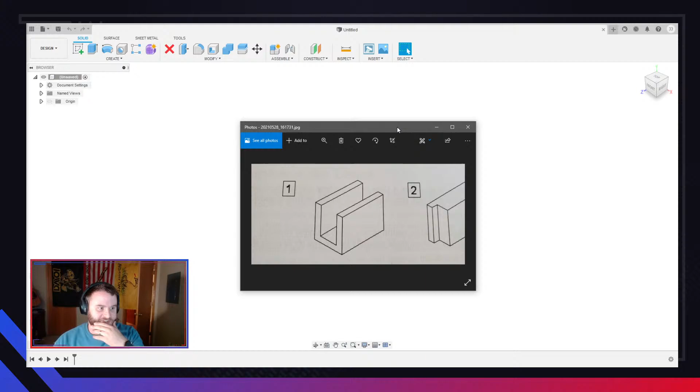The point of these problems is just to kind of get used to whatever modeling software you're using. And we're going to use Fusion. That's what most people use because it's free. So, we'll drag it on there. This is the first one we're going to make. It's just a U-shape. This one's going to be super simple, just an extrusion. As we go through, they get harder and harder. There's roughly 50 or so of them.

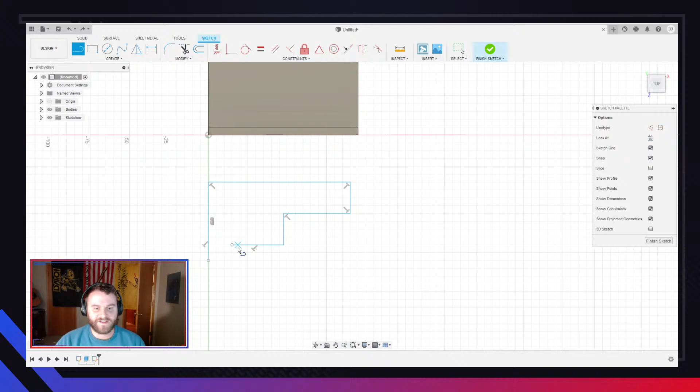All right, we'll do this step. Let's just keep this on the same plane. We can see it's just a simple step pattern like a stoop. These first couple ones are pretty easy. It doesn't have to be exact. When I took this class, each section has different things in a modeling software that it wants to teach you, and this was just to make sure that you understood that.

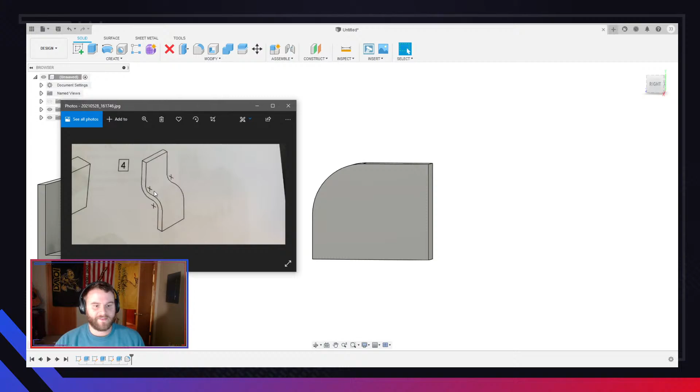Moving over to this shape, this is kind of different because we got these circles here. Now you can try to make this by using like a fit point spline to make a curve, but we're just going to use that fillet tool again, and we're just going to come down. We're going to offset this because we want it the same everywhere. Connect them. Now just like that other piece, I can put my fillet in right there. Let's make it a little deeper. Let's say 15. Oh, that doesn't look the same.

Well, you know what? I actually may have misspoke, because if I just do the fillet on this side, I'd have to extrude it first. If I just did the fillet on this side, watch what happens. So I can do a fillet over here, 15. I got to make sure though that I come up here and do that. So in this case, doing it all on the sketch would probably be the best bet. But either way, we've got it.

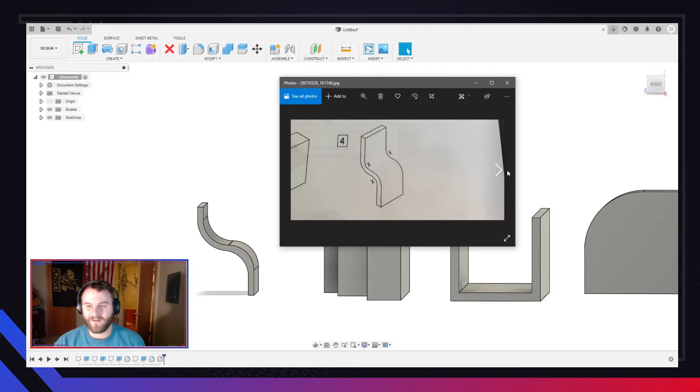This has been just a couple minutes. We've already gone through 4. Like I said, these first ones are going to be super easy. But as we get harder, especially towards the end, we're only 10% of the way done. They're going to start getting a lot harder. This one, we have some circles. Fusion makes this super easy.

We'll just get some circles up here, right? A big circle. See how this line comes? Tells me it's center. I can do it over here, whatnot. Do a smaller circle. And we can just come up here to the apex, and it'll literally help me with that. And I can select all these shapes. I'm holding shift, and I can extrude them up.

You can see the lines weren't exactly where I wanted them to be on this side. I can right click on the sketch, and I can edit it. You see how I accidentally came out? So let's delete this line. Let's just drag that point right where it needs to go. Hit OK, and then we fixed it. So boom, there's 5.

Number 6. All right, how are we gonna make this? Any idea? Let's do a square, and then we'll do a circle, and then we can do another circle, pushing it through, or we can just do it all in one go. We can do that too. So it doesn't really matter what plane we sketch on. So we can do like a square.

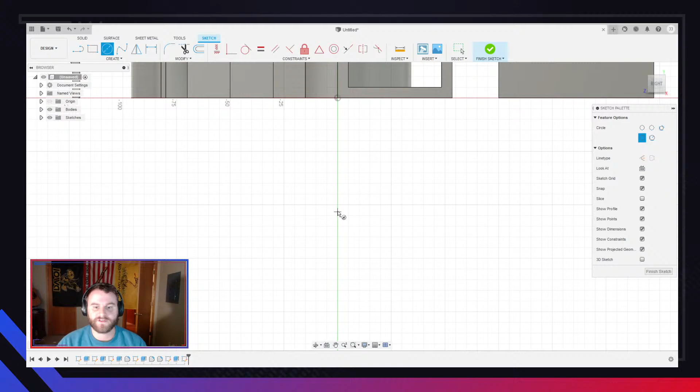See how I come over here and I get this triangle, which means I'm center point. So we can do that. And then we need to have our inside. This isn't going to look exactly the same. But now I can select what parts I want. You know what? That doesn't even look remotely like what I wanted. My fault. Let's start with a circle and then do a square. So that'll be our outer part of the arch. That'll be our inner part of the arch. And then we can do a center point rectangle. And we can do that.

Cool. Now the cool thing with Fusion 360 is, if I was using Creo, Creo wouldn't like me to do this. But I can select this arch and I'm holding shift. Sometimes I can't remember if it's shift or control. I think it doesn't really matter on this. But I can just select this top part and then I can select these as the only parts that I want to extrude out. So I can extrude those out. Bada bing, bada boom. There's our shape. Easy peasy lemon squeezy.

Number 7, a bushing. Do I really need to show that? We kind of just literally did that with a circle. Like I said, I'm just going through this textbook. Some of the chapters have you assemble these parts into a big thing, and you can spin them all around and stuff. But we're not going to do that. So look at all these parts we got. This was just a couple minutes. It's pretty easy.

This part's going to need 2 extrusions. So how are we going to make this? Well, let's break it down. Let's make this part first. Now we can either make this as a square, and then we can cut the notch in. Let's just model it with the notch already in it.

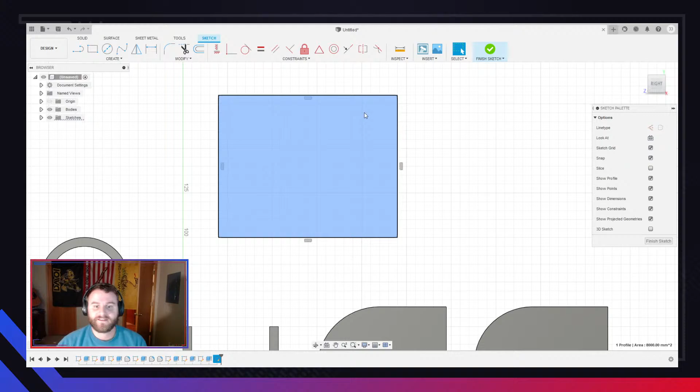So lately we've just been doing the same plane. Let's start, let's take that. And now we need to make our notch. We're going to learn how to do a mirror right now. So let's take and actually extrude this out. And basically I'm going to make one side and then I'm going to mirror it over to the other side.

So what I need is a plane for this. So I want to do a mid plane, midway between this object and this object. Cuts it right down the center. I can click this surface now. This is a surface I want to be sketching on. Create a sketch. And I don't really have to remember these measurements because whatever I'm going to do on this side, I'm going to mirror to the other side. And I don't have to finish it, but I will just for good etiquette.

So now what I can do is I can take this, I can extrude it distance to object. I just want it to come to this back side. And then I can take this extrusion, I can create a mirror. I already have the extrusion selected, and I can mirror it across this mid plane. And there, it cut it. And I know that that is perfectly in center, mirrored from the left side to the right side.

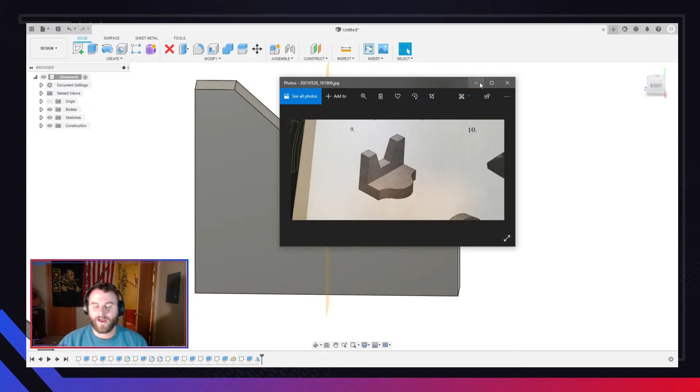But we have to add this little part right here. So how can we do that? Some people might be tempted to draw it on this back side and then extrude it up. We're going to do 2 steps. We're going to make a square and then we will fillet it. Well, if we did a fillet there, it would have to come up and around. I guess we'll do that on the back side. So create a sketch.

I regret now leaving all these shapes here, but that's all right, because even though I'm sketching on that bottom part, I can still come and view at the top part. That's totally fine. And I'm just going to come to the edge, see how it snaps in. It will kind of snap in on this point, but not really. But what I can do is I can do a 3-point rectangle. And that way I can have 1 point be here. It kind of didn't do it. 1 point be there.

And then you see, oh, that's why I didn't snap. It's because it was the wrong shape. Let's try this again. I can snap 1 point here. I can snap 1 point there, and I can bring it out. And then look, it's kind of got this circle shape with some fillets. So we can do that. Triangle to find the center point, bring it in.

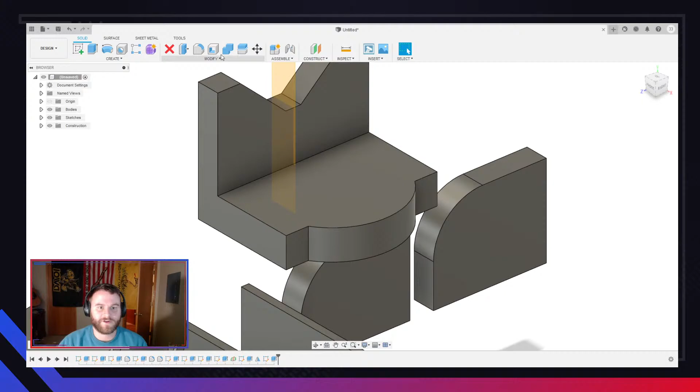And we're just going to extrude. Well, we're going to extrude everything but the part that's touching. And we'll just extrude it up. And that has some curved geometry. You know, I'm not going to go back and fix it, but we can select these points right here and give them a little bit of a fillet.

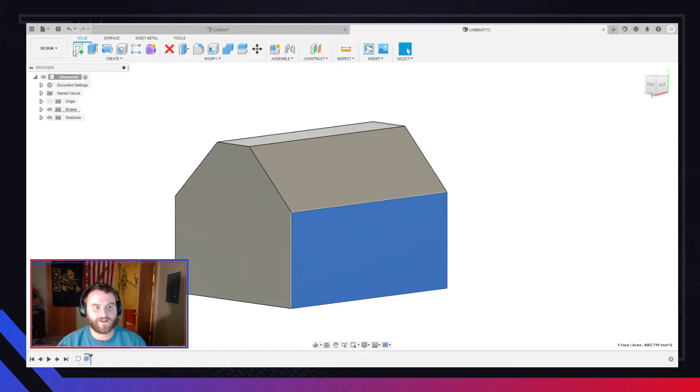Boom. And then what shape do we have? Well, that didn't really work out very well, but we just want to extrude out everything but this circle shape. So that's fine. I can click on this wall, and we're kind of doing the opposite. We're putting in everything that we want to keep. So I want to keep that circle. I want to keep a square.

Right, and this can come all the way down. And then what I can do, I don't need to do all that. I just need to do this part. I just need that. And I can extrude this out. Boom. We didn't get our dimensions just quite right, but it's good enough for government work. It's good enough for what we're doing.

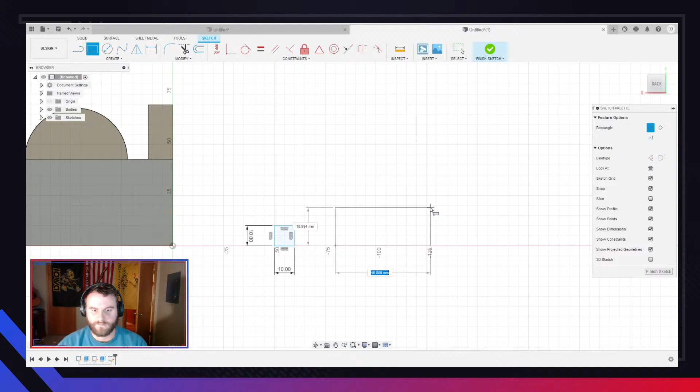And then number 2, I can do these 2 squares, and then I can mirror an arch over these. So why don't we do that? Let's take and make our 2 squares. And let's just do 10 by 10. How far apart? It doesn't matter. 10 by 10. Let's extrude them out 50, and then we have arches over them.

How can we make these arches? Easy. Or how can we make 2 of them? We're just going to use that same tool we did before, that same trick, the midplane. And then we can sketch on this one, and we can do our first arch. You know, you can do different types. I never remember which one I like to do. I guess this one is good enough.

You know, because they're all kind of different. Well, see, they're all kind of different. Let's do this one. See, I completely freaking forgot, you know? I literally just did it. And like I said, I forget what arch is what. And remember, we need to connect them. And then we can extrude them out.

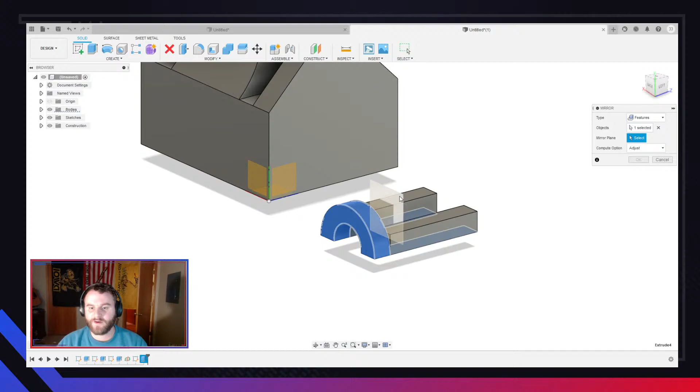So there's our arch. So we need to bring it over to the other side, remember? So I want to click this extrusion just to make it easy. Create, mirror. Our object is already selected. Our mirror plane is this one. And we've made our part. Is that backwards? Did my dumbass make it? Yeah. Oh, it's all right though.

All right, this part, we're going to make this with two pieces. We're going to do two extrusions, one extrusion up, one extrusion down. This first chapter is almost all about extrusions. So we've got a square, and what else? Then we have a circle on there. This is kind of like a part that we did on the last one. Let's extrude it. And then I can just come in here and I can extrude it again, taking away material.

So there's my center point, and this circle right here will tell me when I'm in the center point of that original circle. So I can click that, open it. So now, this time when I hit extrude, before we've just been joining, you can see here. Now, Fusion will do it automatically, but when I bring it in, it'll turn red and it'll cut. Now I can do all sorts of things. I can only cut it this far. I can cut it that far.

But one thing you should do is come over here, and where it says distance, you should either change it to all if you want it to go through everything, or to object, and you can click the object that you want it to extrude to. But this is good because I can also hit this object over here and it'll extrude out that distance. But we'll just do it there. And there's our shape.

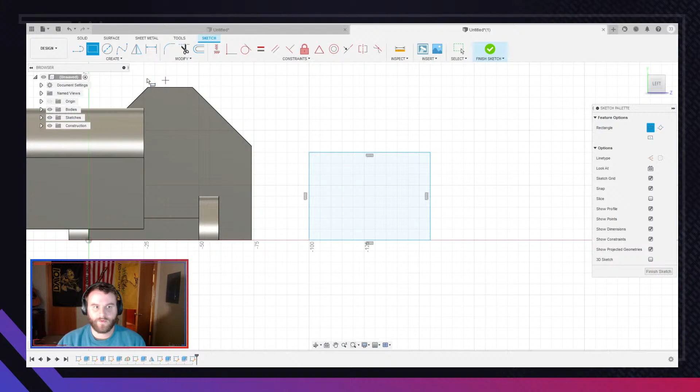So we got another one. This is going to be just kind of the same shape, the same pattern where we come up. Remember last time we used constraints? Sometimes people will sit here, and I know I did when I first started, I would sit here with a notepad and I would write, okay, I made this one 24.083 millimeters long at 138.4 degrees. Okay, no, just make that, bring it in.

And then we're gonna use our equal tool. That equals to that. This equals to that. Bada bing, bada boom, we're done. Especially for this where it doesn't really matter what the length is. So that needs to be extruded out with a circle. So we're actually gonna go back into the sketch and we're gonna give it a circle to begin with. So there's my equal point.

We're gonna extrude this out.

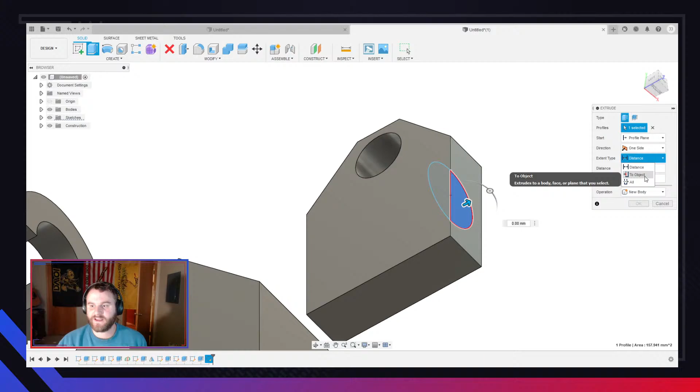We'll bring that up a little bit because we've got to remember that we need to make room for our cutout. And we can extrude it. We're going to do the same thing to object. See, if we did it, are those matched? If we did it through all, it would keep going. I don't think there's anything in the way yet, but we'll keep it there. And there is our object. Easy peasy, lemon squeezy.

You know, I was talking to CTRLPew about this, and I was like, hey man, is this something that your viewers may want to watch? And he goes, possibly. He goes, but I think my viewers would be more interested in actually 3D printing, like making a firearm. And I was like, I can't do that on YouTube Live, dude. Plus, I've never really done it on my own from scratch, so I kind of want to be that good. Ugh. But that's all right.

So moving on to the next one. This one's going to be some fillets. We haven't done a fillet in a couple times. So let's make our square. Now we can do the same thing. Well, let's extrude that out. And we can do the same thing we did before. Remember where we right-clicked, sketched, and we offset? We can do that too.

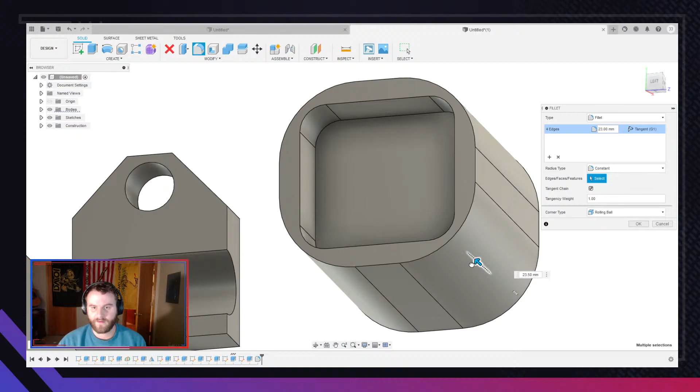And we need to extrude that square in. And then we can come in and fillet the insides. And we could have filleted the outsides at the same time if we really wanted to. But I kind of want to give them a different dimension, like maybe a little bit deeper. Yeah, that's a lot different. It's a lot more round than I wanted. But it's the same principle, you know. So what's the next one?

Next one's this kind of jazzy shape. Jazzy, what is jazzy? What the hell does jazzy mean? Oh yeah, this shape's called jazz. Well, isn't jazz what you'd see at Taco Bells, that weird busy design with the different colors? I'm pretty sure that was called jazz, like American jazz or something. I'm pretty sure that is that.

Remember before where we did the equals? We can do that again.

I don't know. I'm not a design person. My wife, though, she went to art school for a while. And so she actually... Now, hold on.

Let me stop my tangent to talk about this. I just did that shape. So, I essentially want to cut this out. So these don't really matter. But I need to make sure I do a line over here, because this is actually what I'm going to extrude out. See how now I can select it? So we're going to use the not parallel, equal. That is equal to that. That is equal to that.

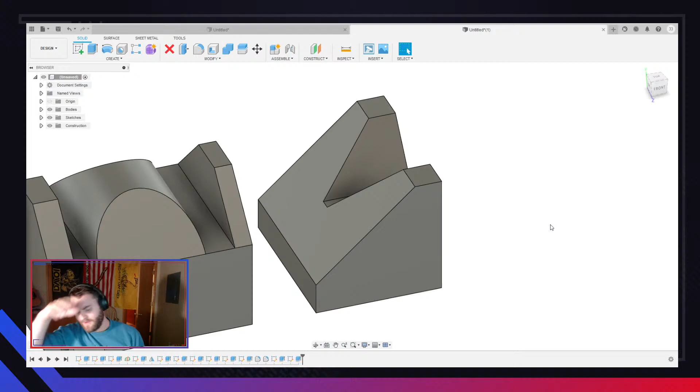But all the time, she'll see a design. I'm like, oh, look at that guy in that flannel shirt. And she'll be like, oh, that's not flannel. That's Irish creamsicle dream of independence. Don't you know the difference? I'm like, what's the difference? And she goes, oh, well, plaid is just lines. But then Irish creamsicle is lines and then little lines. And I go, how the hell do you know that? Like, what is that? Is that what all the money you spent on art school got you?

This is a square. This is a square. It's just a square and a circle.

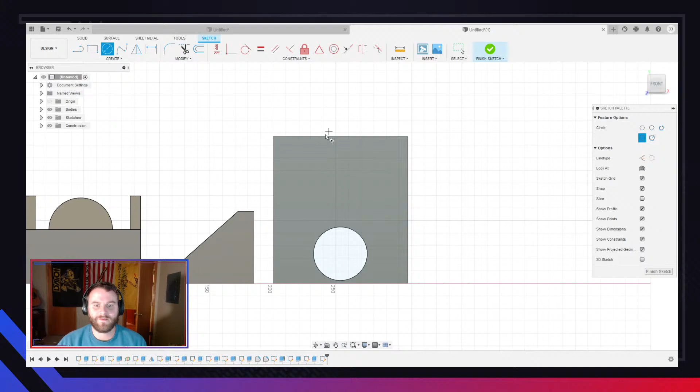But the issue is loading the slideshow up, it just wasn't working. And it would only do a couple at a time, but I couldn't get it to just load them all. So I thought, oh, why don't I just pull the pictures up and then have it stream in a little box, that window. Then it decided that, technically, because the name of the window changes with every other picture, after the first picture it's not going to work anymore. And I was like, this is some bullshit.

So look at this. We're going to do another extrude, but we got to do 2 sides. Because look at this, it comes all the way down and we made a boo-boo. We could have made this circle on this other side, or we could have just extruded it that way. But we made a boo-boo, so we got to do 2 sides. And I don't know if you know this, you probably don't if you're watching this, but I can extrude both sides. I can come to one side, I can come to another side, I can come both sides equally, or I can do one side a little bit and the other side a whole lot. It's totally cool.

It's fab. So I can come over here where I have one side. I have the 2 sides, right? That's a little bit one side, a lot the other. And then I have symmetric. So I want to do 2 sides. And this distance, right? I can just drag it. That's fine. I actually need to do both of those. And then this one is going to be to object because I don't remember how thick I made this. So I can just click back here. It's going to automatically default to cut, but it's easy peasy to just come over here and just hit join.

And there's our shape. Oh shit, we forgot that part. That's all right, because we can just extrude that away. Oh my goodness, look at that. I love how I'm using this textbook that's for Creo when I could not have done that in Creo. I mean, I could have, I would have had to make a new circle, but it would have been a pain in the butt to do with Creo. We've only been doing this about 30 minutes, and in Creo we would have been here probably an hour already.

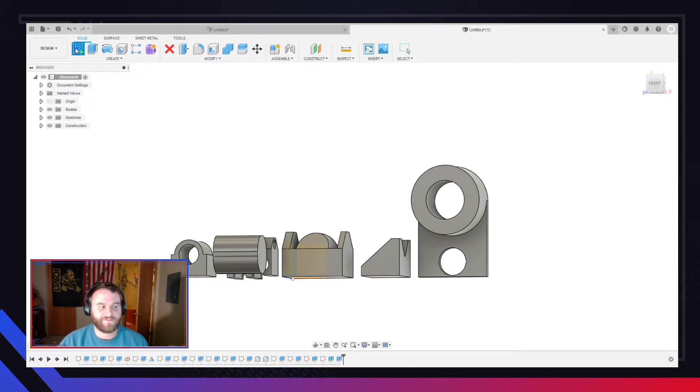We're kind of getting into the hard parts now. Just kidding, this one's easy. But the next ones, they're going to start getting harder. And like I said, we're going to try and go through all 50 or so. What are we on now? Well, 6, it started over. We're doing good. We're doing good.

So we can make this as a U shape like we did before. So let's just edit that. A U shape, cut it down, add a circle. So where's this part? Right here, our U shape. Create a sketch. I can just make a line. And I'm not editing the sketch, I'm literally just sketching on the side. And a circle. And then watch this. This is going to be the quickest one we've done so far. Extrude it out to the other side. Magic. Imagine that. It's so quick.

Next one. This one's a little more difficult. So how are we going to do this? Do you got any ideas? Because I already know. Well, do I? I mean, we could technically make this like a block and then cut it through. Or we could kind of sketch this geometric shape. Whoops.

So let's do this. Let's start off with a block, and we'll do the equal thing again. Not a block. We'll do it line by line, and we'll do that equal thing again. So let's come out here. We got the back, we got the outside, right? And then it comes over. I think it comes out, comes in, comes down, right?

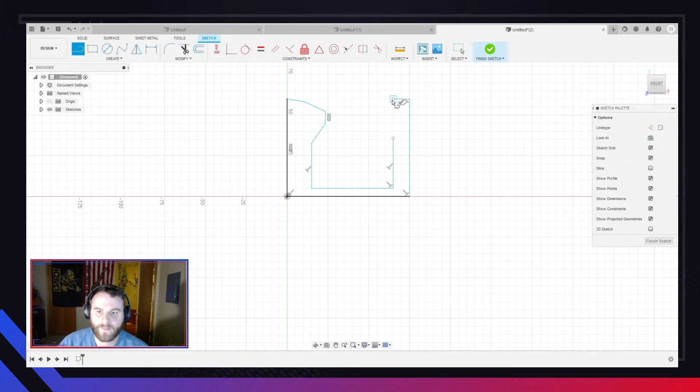Comes out, comes in, comes up to that, something like that. Oh, those are supposed to be straight. We can do that. So straight, boom. Look how it locked in. You see that? It's already locking in that it knows it wants to be perpendicular. So I know that, where's my things? I know I want that to be perpendicular, vertical, that to be vertical, over constraint, it's fine.

I want this to be perpendicular. I want this to equal that. I want this to equal that. I want that to equal this. I want this to equal that. I want that to equal this. And I want this to equal that. And I'm done. And you see how, like I said, dimensions don't matter on this. But we cut that out.

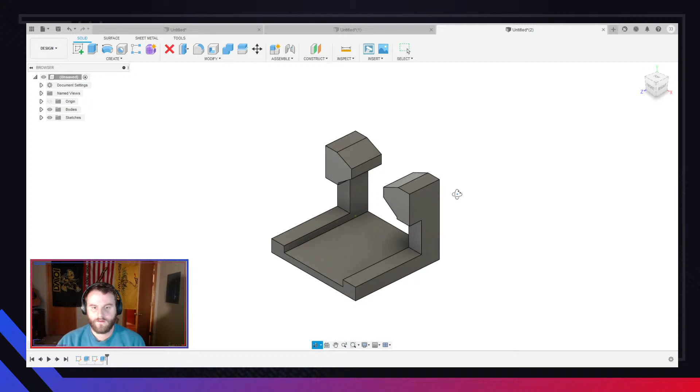And then what's next? And then we have this little blocky thing right here. I can do that. I can come through and come down, over, around, and back through. Right? I mean, roughly, you know, is that an A? No. Is that a B minus? Probably. But I'll take it. I'll take a B minus. That's okay by me.

So next part, we got this shape. We got like an L bracket. So we're going to do that as the name suggests. We'll make an L. You know, there's a couple different ways. We can make it one side, then we can extrude out, then extrude up, or we can make an L. We could round, and then we can add our other part. So let's do this. Let's make our L.

I can come up, and I can come around. I like to use the offset tool, as we've discussed. We'll just say 5. And I want to close it. Now, let's extrude it. And now we need to make our rounds, right? Because it's rounded on both sides.

So we can hit fillet. We can select that, and we select that. And because we did that offset, we know that it's the same. Hit 10 because it's 20, right? It actually won't let us go more. It'll block out. Yeah. So we can just do 10.

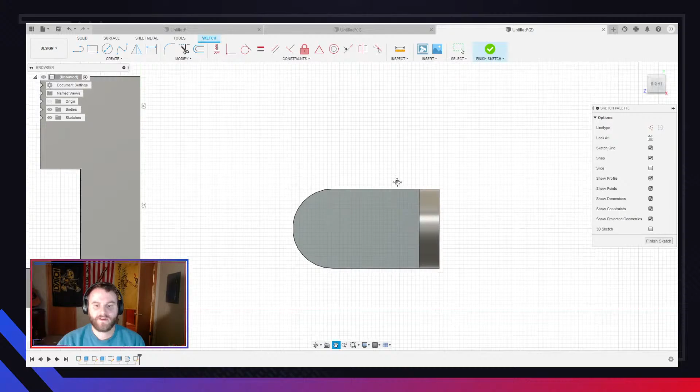And then one cool thing is we need to do those circles. Even though we did a fillet, it'll still tell us where the center of those circles are, right there. So we can hit that. We can extrude it. We can come over here, do the same thing on this side. Extrude it.

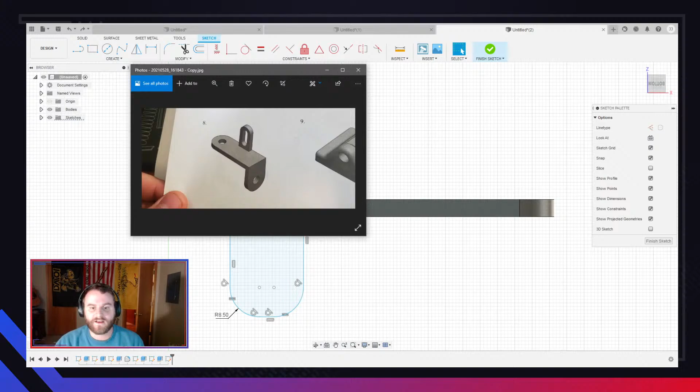Well, that one's actually a slot. So we're going to add our slot. And now we're going to extrude this. Boom. So before we would have had sketch, extrude, fillet, sketch, extrude. That's 5 different steps. And what we just did is one sketch and one extrude. So we went from 5 steps to 2 just by simply doing that. So that was the easy way.

The hard way would have been coming here on top, making our square, right? Extruding it up, filleting our sides, sketching our slot, and then extruding our slot. So which way would you rather do? Would you rather do the easy way or the hard way? Not that it was hard, it's just a little bit more time consuming.

So next problem, we're slowing down. This one, just a square with all these different rounds on it. So that's totally fine. We can do this, right? So let's make, what do we got? Like I said, I need to pull this up so I can remember. So we'll do a square, and then we got some sort of circle thing, right? And we extrude it.

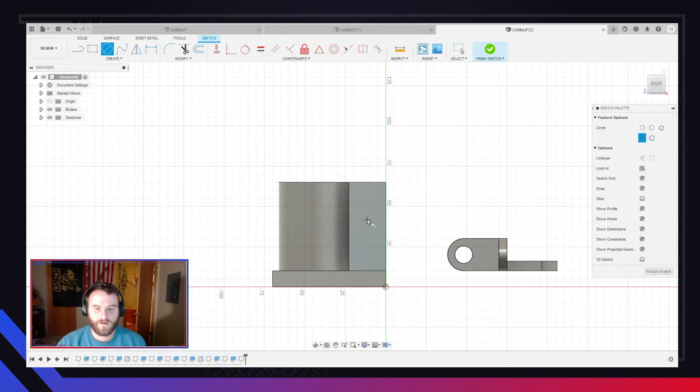Well, I guess that's not quite right, but that's fine. And I can hit extrusion on this side. I can do another circle. You know, there's a center point. I can drag it over. I can do something through there. Extrude it. This has a circle all the way through, right? There's my center point.

Extrude it out. And then this is kind of doing the thing where if you ever find yourself and you made something ugly, just add rounds to everything, you know? Just come in here, hit fillet, and just enjoy yourself. Just click literally everything and say, you know, YOLO, you're not the boss of me. If I want to make all this round, I'll make it.

Oh, what do you mean it's not makeable? And you'll be like, it doesn't matter. This is just a world of my imagination. I don't care what you think. And just bring it in. Oh. And look, is that the same? No, but you get the gist, you know? Oh, so sue me.

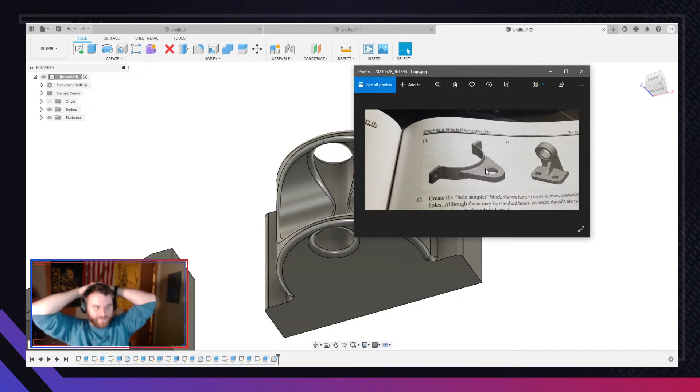What's the next one? All right. This one we're going to need to make a plane. And this is kind of where we start getting into it's not so simple. There's more than one way to skin a horse. So for this way, we can basically make that U shape. Then we can bring that thing in and then we can cut it. So that's probably the way I would make it.

So we'll make our big ol', there's our base. And then we'll use the arc, center point, 3 point. I want to do a 3 point. Well, I don't want to go all the way. I can do a line here and a line here. And I want to make sure that those are equal to each other. And then I can make a 3 point arc. My 1 point, my other point, come up to there. I can hit this and I can offset it just a little bit. It doesn't really matter.

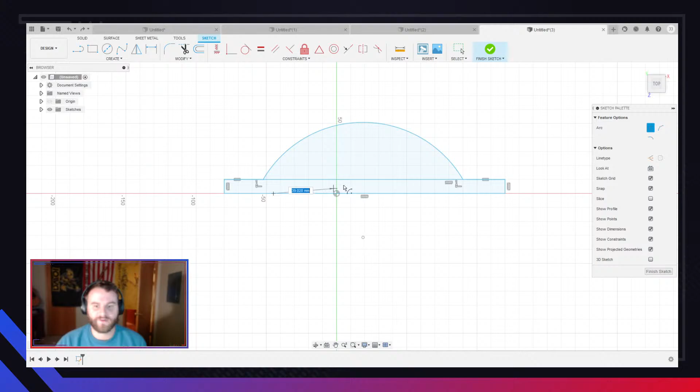And I can extrude this out. Well, no, because I want this part, so I have to finish that. So that was wrong. I need to basically do a different arc. See what I mean? I was getting really cocky, and I knew we'd get to a point where I'd start getting less cocky. See, that's too high. All right, let's try this.

Let's offset it. Don't chain the selection. Take off that one. Just do this one. Hit OK. Well, I should bring this down. There, we'll do that. And then I can make this. I knew there's a point where I would have my foot in my mouth. And bring it up. For those just joining us, we're making this shape right here.

What's up, CheapShot? Already learned something, the constraints are badass. Yep, the constraints are badass. And you can use that for a lot of things. If I was sketching on here, you've got a lot of different ones. You have horizontal, vertical. Coincident, so things that are touching. Tangent, that's really cool for circles. This circle tool is a 3 tangent circle. So if I say that I want something tangent on 2 or 3 lines, it works.

Equal, you'll use that a lot. Parallel, 2 lines parallel to each other. That's kind of like the offset. Same thing with perpendicular. Fix, you just want it to stay there. So if some other line moves, that line doesn't move. Be careful with fix because it's really easy to get over constrained. Over constrained is basically where a line is like, I can't do that because I've got too many things holding on to me.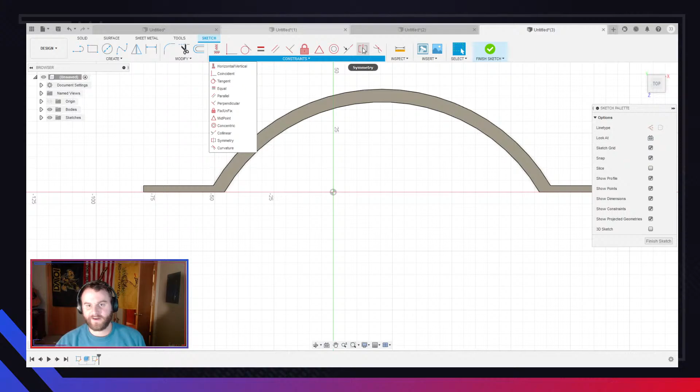Midpoint, it kind of does automatically. Midpoint on a line, coincident, collinear, symmetry. There's a lot of different options in here. I normally don't use constraints a lot. Constraints are good for very complex parts, but the things that I'm designing and printing aren't that complex, and especially good if you have another person working on the same project.

You know, if someone's doing that, there might be things that you don't want to move, like tolerances, or where these bolt holes might line up. So for example, it would be a good way to lock these. If I were to make these bolt holes, it would be a good idea to lock these bolt holes in place.

That way, it sounds like I'm saying buttholes.

It would be a good idea to lock these bolt holes in place because all of this can change. That's fine. But if the bolt holes don't line up, then it's not going to attach to whatever I'm bolting it to. So that would be a good thing to use those constraints for.

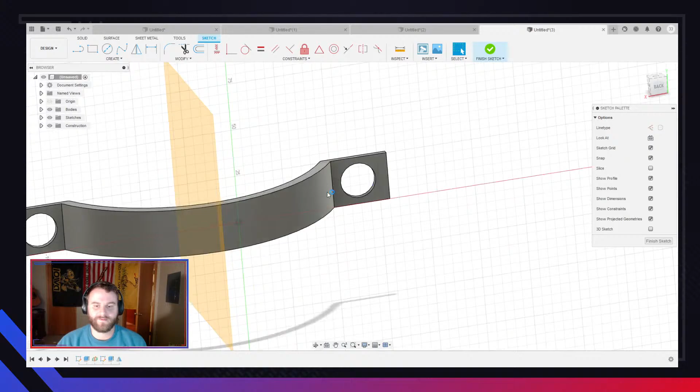So now we ask, how am I going to get this part off the side of it? So you know how I used this as a midplane? I'm going to basically make another plane. You know, I don't need to make another plane. I can just do it from here. So I'm going to sketch on not this plane, and I'm going to basically make another plane halfway down. So I'm going to make a plane here, but it's offset.

I changed my mind. I'm going to make another midplane, but this time between the two. Then I'll sketch my part, and then I will extrude it a little bit each way, the symmetry. So what do we got? We just basically got a thing that's rounded. So let's just come up to here. Right? And we'll use these equals again. We'll make that equal to that. See how it didn't lock in. There we go.

And you can use symmetry, so you can say I want that symmetrical on another piece, like this. It's gonna mess up, or it's not gonna do it. But you can do that, that works too. And then for this, what's it got? It's rounded. So let's add our rounds. Oops, I'm not done yet. It's got a circle. And then I can just connect these.

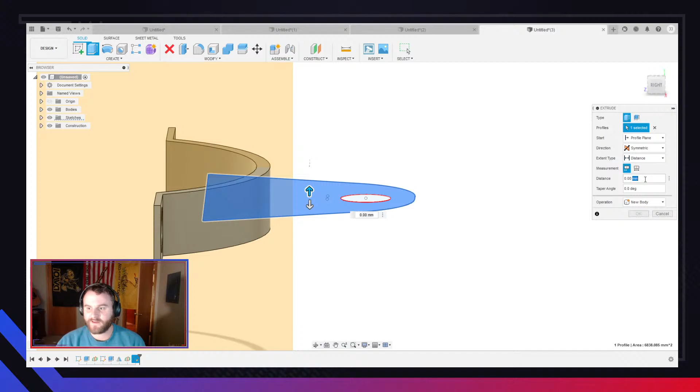It doesn't really need to be connected, because what I'm going to do is extrude this out, two sides symmetric, because I want it to go the same way both sides. It's cutting because it has that. We want to join it. And even though we have this part here, like I did before, I can click on that, extrude it down, and delete it.

Now it does have some fancy little features, some more fillets. I can fillet this. This will be especially good for 3D printing. When you're 3D printing, 90 degree angles are your enemy, because that's where you have a weak point. So fillets are good for structural. This will be a lot stronger than before. Now, if I were doing it a different orientation, you may also be interested.

It sounds like I'm trying to sell you a Bible door to door.

But you could have a fillet right here, depending on the orientation you're printing it. And that'll really beef up strength. But there we have that. So next we got this part. This part we have a base, another part that comes up, and then a circle. We can make this part pretty straightforward. So let's make our base. It is just a rectangle.

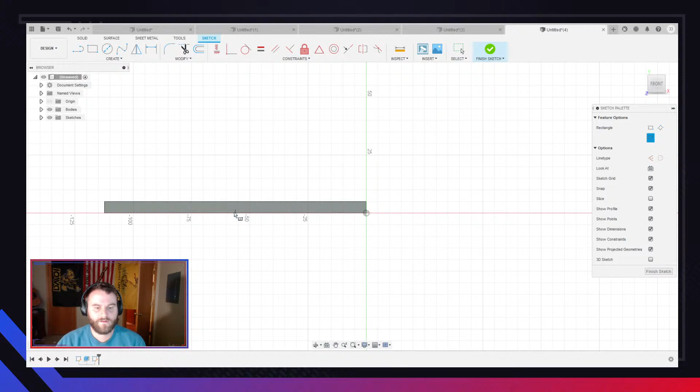We have some fillets over here, and then we have some bolts. See how I can lock this; these are different sizes. I can do equals on these too. Nothing says you have to do equals only on lines. So extrude that up. Right, we got that. Next part, see how this part's kind of off on the side? That's fine. So we can sketch on this side, and we can do a center point rectangle like that. And it's got a circle that kind of sits in it.

That works. And then we can just extrude this out the back. It kind of had a two-part chamfer on it. Not a two-part chamfer, but like a two-part circle thing. So see how it snaps to that? We can bring it out. And now there's not enough room for me to do that other feature.

So one thing that I can do is I can come back to this sketch. I can edit it, and I can make it a lot longer. So I can come over here to sketch dimension, and I can see that I need to make it a lot bigger. And because I didn't use constraints, that didn't come with it, which, you know, sucks. But I can just bring it up, it's fine. And then it did all that.

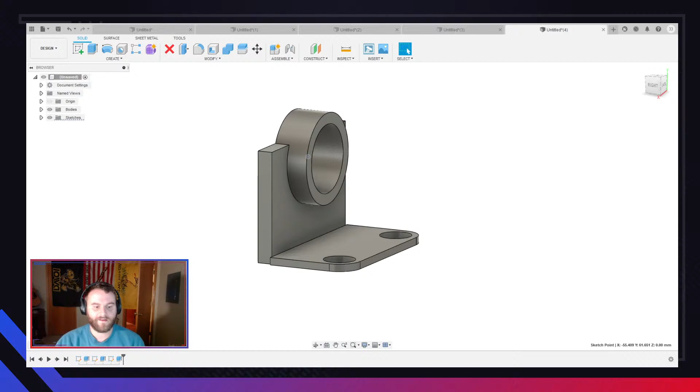So we got this little support piece. There's a couple different ways we can do the support piece, but it's what you're comfortable with. You know, it's almost like a fingerprint.

There was a kid in one of my modeling classes who actually got caught cheating because he wasn't doing very well, which I don't understand why. It was a very easy class. He turned in his final, which was a multi-day project. You had multiple days to do it. And he turns in this beautiful project, this beautiful modeling. And they go like, dude, this is better than what you've been doing, but you clearly did not do this. And he admitted he paid someone on Fiverr like $50 to do his final project.

But you kind of get your own style of modeling and you develop that. I'm a big fan of extrusions. I don't really like sweeps and blends and stuff. I mean, you have to use them sometimes, but you kind of get your own thing going.

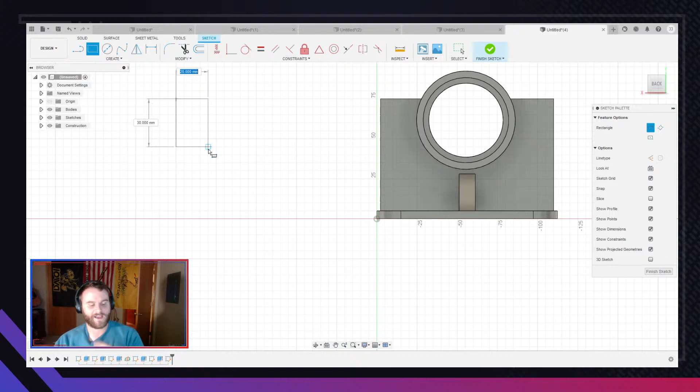Real quick, can you clarify the difference between a 2 and 3 point rectangle? Yeah, so all it is is how you make it when you're sketching. The default's a 2 point rectangle, so I'm just making one point and then I'm making another point, right? So I drag it this side, I drag it this side. The 3 point rectangle can be easy if I do it over here and bring it over. Sometimes that might be trickier.

So you might want to do a 3 point rectangle where basically you're doing one side and then you're doing the other. So you start off with a line. I know that I want this one to be 94, and then how high it is. Instead of doing both sides at the same time, you're doing one side and then the other. So it really doesn't matter. It's great if you want it to snap onto something.

So if I want this to snap on there and I want that to snap on there, whoops, that was the wrong triangle. If I want this to snap on here and this to snap on here and I want it to come up, then the 3 point rectangle is for you. But like I said, you kind of get your own design, your own fingerprint on how you want to make these parts.

I remember when I was a Cub Scout... These are different things. This is a Creo specific thing, so I'm not actually going to do this. But it has different ways you can make holes, like bolt holes. Oh, you know what? We actually do that. Fusion's got a hole tool. So we've done a lot of extrusions to make our holes, but these things actually have hole tools.

It's under Create, and it's Hole. And I can click on where I want to make a hole. And then it'll have all sorts of different features, the different types that I can make. This is good, especially if you want to add different things to your 3D prints, and I want this angled shape.

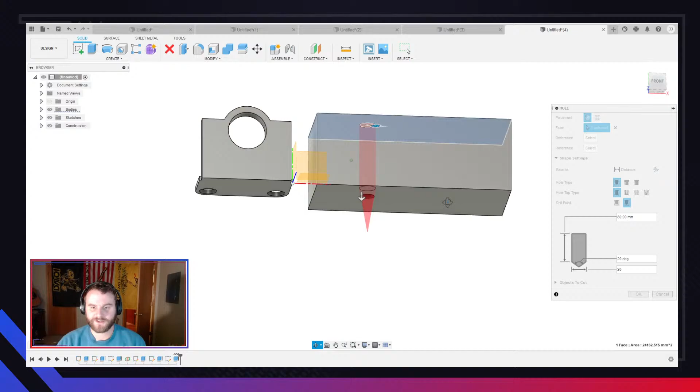It can really help a lot. But I'm not going to play with that too much. But there's a hole function. So I'm considering that one done.

We got a bolt. This one's tricky because it's got the groove in the top. So how are we going to make that groove? We've just kind of been YOLOing where we're designing these parts, and that's because of the nature of what we're doing. But with this one, now we need to have some more thought. We're getting towards the harder parts. So we have a hex-shaped bolt, right?

So I think what we're going to do is make a hex, make a circle, and bring it in. Then we'll bring another circle out, but we want to make sure that we have this on a plane, so we have a plane here to make this cut. So when I make my hex, this is the thing that pisses me off about Creo: they don't have a hex tool. You have to make it with equals and everything, and I hate that.

Versus in Fusion, you have, can I find it? A polygon tool. So, do you want it to go to the wall or do you want it to go to the point? For us, it doesn't really matter. So there's my hex. There's my circle. Now you notice I made that in the center. I'll tell you why in a second.

So now I can come in and make a sketch on here because it can't go all the way through. And I can just make that equal. See how before I couldn't click in the middle, I had to make that circle. I can bring that out. So there's my hex head. I can sketch on this. I can make the shaft of my bolt. Bring it out.

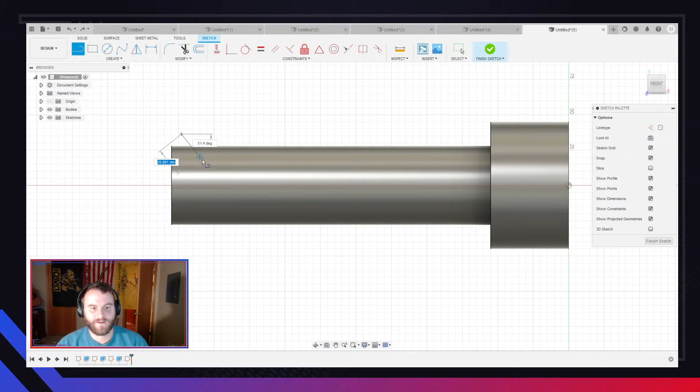So how am I going to make this little groove in here? Well, I made it in the middle. So now if I sketch on this plane, I'm right in the middle, and I can just make a bowl shape, using my favorite equal tools, because it doesn't really matter for this. Make those equal to each other.

I want to make these parallel. And I want to take this whole thing and just drag it. I can't unless I move it. No, it's not going to work. But I have that finished. And then I can extrude it. And I want to go symmetric, but I just want to go a little bit. And it made my slot. This would be great for like a cotter pin or something.

And the rest of it just has some, not fillets, it has chamfers. Just to kind of make it purdy. And there. We got my little bolt hole.

Oh, when my wife gets back from her trip, I'm gonna call her that. She's gonna get back from the airport. Oh, my little bolt hole, how are you? How are you, my little bolt hole?

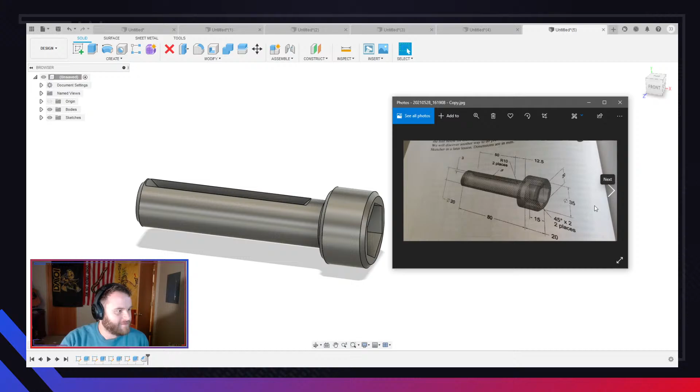How many more of these we got? Like I said, we're going to try and do roughly 50. We're going through it all. We got 1, 2, 3, 4, 5, 6, 7, 8, 9, 10, 11, 12, 13, 14, 15, 16, 17, 18, 19, 20, 21, 22, 23, 24, 25. So we're about halfway. I don't know if we'll get through them all. Some of these are about the same.

So these are sweeps. We'll probably just do one of those. Some of them are just learning the pattern tool. So literally making this will be the same as making this. It's literally just the pattern tool. So let's keep going. We did that. This is using the revolve tool, right? So we'll just do one of these because it'll all basically be the same.

My headphones just died. Oh no.

Sorry. I think I had a little audio issue.

Printed takedown pins. Yeah, that could be a good idea too. I don't know how well those will work, but you can do printed takedown pins.

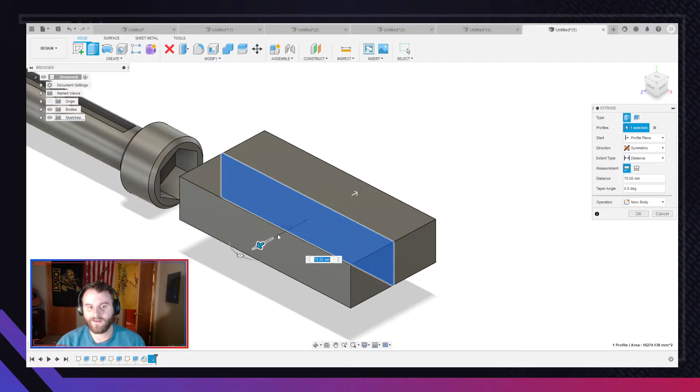So this one is a revolve feature. So what's a revolve feature? Basically, you're doing a plane of something and then you're making it circular, like a chess pawn or something. So we want to take and do this. Same thing, we want to pay attention to the axis that we're on. So when I extrude this, I'm going to make it symmetric. That way I keep it in the center axis. And then I want to sketch on that center axis. And I only want to do half of a shape. So that's going to be my line.

And then I want to make some kind of weird shape. And it doesn't really matter. I can do anything. Isn't that the Reading Rainbow? So I can do that.

And then let's say just for some gosh darn reason I wanted to make this revolve around. Well, I can select my sketch, create, come down here into, where was it at? If there's anything in here you want to learn, let me know. I'm looking for revolve. There it is, revolve. So I already have my profile selected and it's going to ask what axis I want it to revolve around. I can do it on this one, but that looks pretty funny. That was like a jet engine. Or I can do it like I intended on that one. And boom, that's a revolve.

Yeah, so Adam, what CAD program did you originally learn on? Because I know a lot of people, if they haven't used CAD in a while, it was either Creo or Autodesk, or I know one guy, he still uses OpenSCAD, which was literally like, if he wanted to make a circle, he had to code in circle, this point. And he sent me a file one time and it was just ridiculous. I can't look at this without being old. So what did you learn to use CAD on?

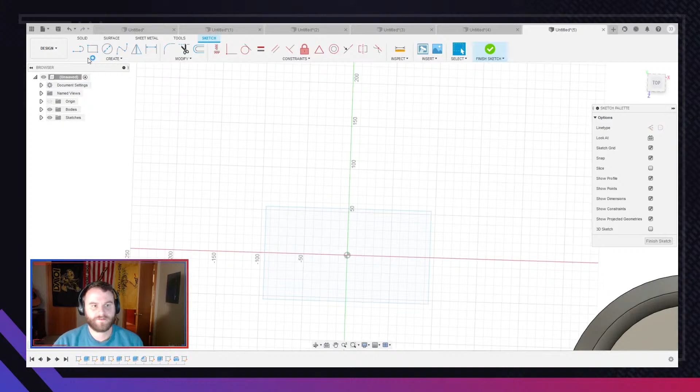This is a mirrored pocket. So let's make just a square. Open it up. Bring it up. And basically we're just going to make one point of it. I'm going to do some center lines. Some modeling programs have what's called construction lines, so it's lines that you can make that don't really matter. I'm sure Fusion 360 has them too. I just don't use them.

So we want to make some more lines, and let's just say that we want to do just a weird curvy shape. So I can take this, and I need to add just a couple of things. These lines I added, they don't really matter. I think that's why it doesn't really matter about construction lines, because you can choose to ignore them in Fusion, versus Creo is going to get really mad if you don't use them. So now I can take this and I can extrude it down.

SolidWorks for school. Yep. A lot of schools use SolidWorks.

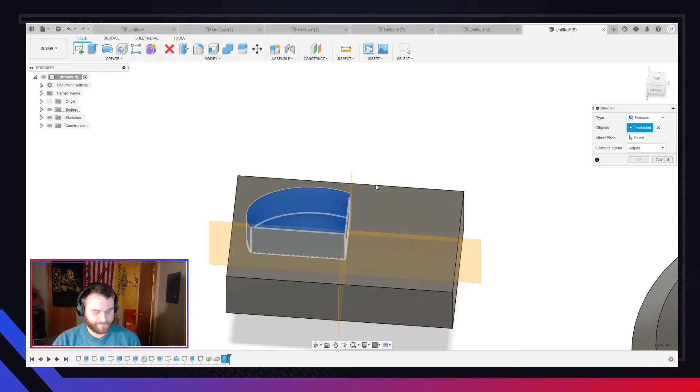So I can take this, and we've already done a mirror. We've gone a little ahead in the book. So I can select this profile, and I can do a few things, right? So I can mirror it across this plane, and I think I could also mirror it across another plane. Nope, it won't let me. So I can mirror it across that plane, which is something we've already done. Create mirror. Well, we've already seen us do mirror.

One thing that I can do is I can also make an axis, if I can figure out how to get it in the middle. Sometimes I can't figure out how to get it in the middle. So I just kind of make a circle, and then I make my axis through that. Whoops, it's not gonna work. And you'll see why I'm gonna make this axis here in a second. So let's make this all the way down. It wants me to use a mirror, but we've already learned mirror. We're gonna use a pattern.

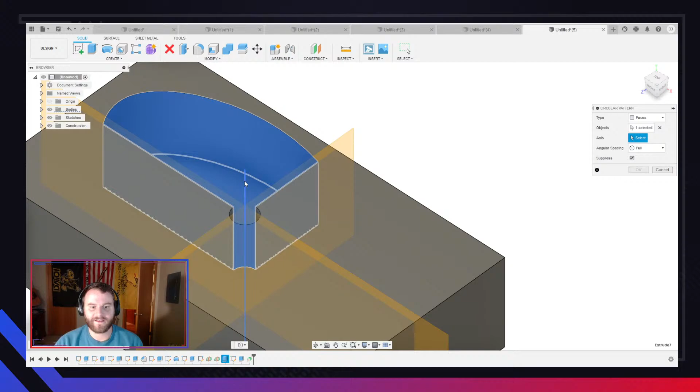So now I can create, and what I'm basically trying to do is get a circle there, because now I want to take this and pattern it. The object I want to be that extrusion, and the axis I want it to be this. And it's telling me I can make 3 of these. Yeah, they're all kind of expensive. I actually realize this isn't going to work because it's not going to show up in the right way. But it's all right. We'll be doing patterns in the next part. That looks like something else. So never mind. I guess I'm getting ahead of myself.

Even Fusion's pretty expensive for personal use. I think the personal use one is like $40 a month.

I don't know. I did that video over getting it, you know, for free. You have some functionality limited too, but I think for most people it won't really matter. But I think it's, yeah, $60 a month. That's a lot, especially like $495 a year. It's probably the cheapest, but I mean, they're asking a lot. But like I said, most people can do the personal use, and they're not going to miss those features.

So I procrastinated long enough. Let's take this part. We are going to mirror it. Our object is this one. Our face is this one. And it brought it to the other side. And then we can do that same thing. We can select those, and we can mirror those along this plane. And then we can do the same thing. And then boom. Does it look the same as this? No, but that's the gist of it. It was learning the mirror tool.

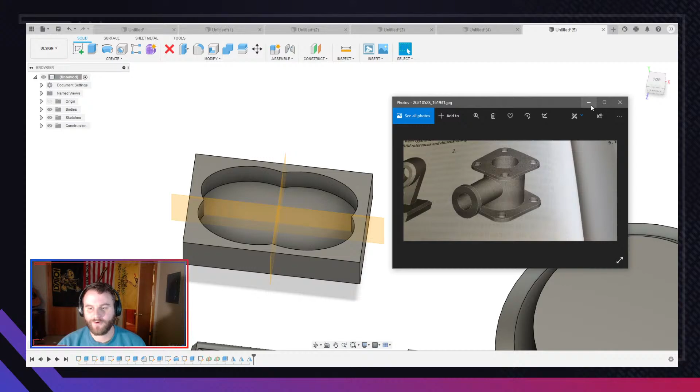So that one is essentially the same as the part we just did a couple times ago. They just added some fillets for a reason. I don't know why we're not doing it. This one is gonna be a little bit more tricky. There's gonna be a few ways you can do this. I'm going to do it the way I like to do it because you're watching me. So let's make a new part. I'm going to start off with the tube. Now, I'm going to have a lot of things that are symmetrical.

So lovely. Thank you. You're lovely, Daniel. So there's a few different things that I can do. So I want to make sure I'm focusing, we can't be doing this again. We need to be paying attention. Get your head in the game, guys.

So right away, we're going to just make this center tube. And we got to keep in mind, we're going to be coming back to this because I'm going to end up filling this tube with shit. So edit it at the top. We need a flange on the top and bottom. I only want to make one flange. So I'm going to make just, well, what did I just say, Jared? I just said pay attention to what you're doing. So instead of making a midplane, I can just make the midplane I already have work for me. Make it symmetric. Boom.

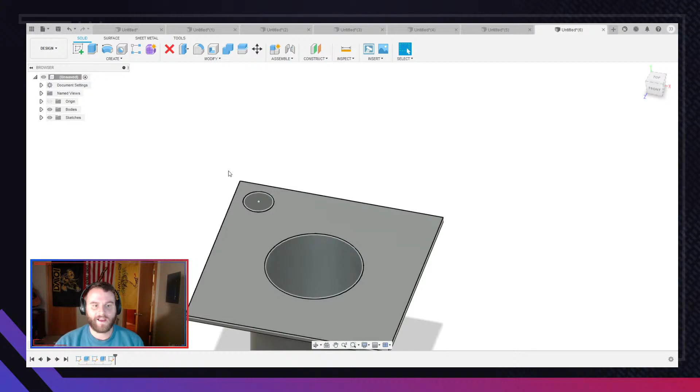So now I can use a center point. Daniel, Brando, when you were talking before about a 2-point and a 3-point rectangle, you can also do a center point rectangle and just do it in the center. But I also need to make this little flange part, right? And I only want to bring up this part. And I need to give it some circles, some mounting holes. I can do now what I wanted to do before with the pattern tool. So here's my circles. I want to recreate these circles.

I need to make an axis through my circle. That's what I'm going to go around. I could have used a circle, I didn't necessarily need to make that. I want to do a circular pattern. I want to pattern that extrusion around this axis. I want to do it 4 times, duplicates it. Now I want this whole thing on the bottom. So I want to make sure I do my pattern, my extrusion and my sketch.

Mirror it. Select them all again because I'm an idiot. Oops. And I want to mirror it along this plane here. And there, oh, I forgot to do my circles, but that's okay because I can edit this circle to come all the way down. Oh, and that means I have to update this. Well, damn. Sorry, hold on. Get the extrusion, get that sketch, get that, create, mirror. On the side. Okay. What the fuck did it do? I'm struggle busting right now, dudes.

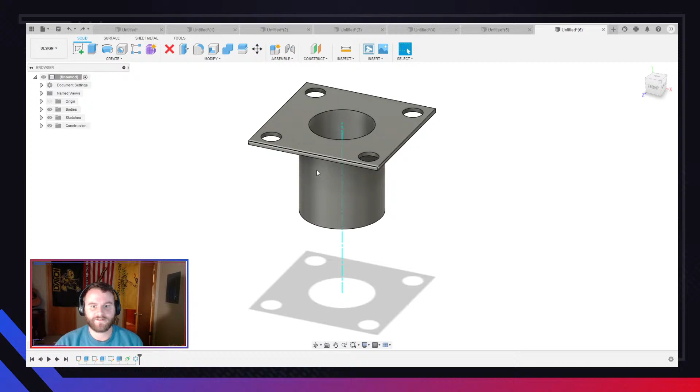We're going to do this. We're just going to mirror this part. Create. Mirror it. Crossed it. Okay. Now we'll take and we'll do our circles. We'll bring it all the way down.

Construct, axis, okay. Create, pattern, circular pattern, object, is that extrusion, axis, is this one, 4, all right. See, no, stick to the stuff you know. So we got that part, and now we need this part coming out. So what I'm gonna do is I'm gonna sketch on this plane, and I'm actually starting my sketch inside of the tube, but that's okay.

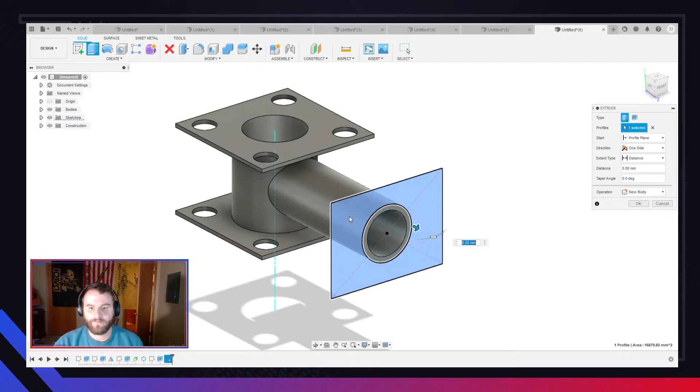Because I'm just gonna delete everything. So I can extrude it out. It's gonna want to go to delete, but I can do join instead. Then I can take and I can make my flange on this side. And I can bring it in this way. I can do my circles. So let's do it without making that axis. I think I can do it.

I don't know. I don't say words right. I think I have a speech impediment. You know, it's one of those things where, like, I've never been told I have a speech impediment, but I've also never been told I don't have a speech impediment. So I don't know if that's a thing. So for all I know, I could be an idiot.

I am an idiot. I think I can just select that circle. Yeah, I didn't even need to make that axis. Maybe I did because now it's wanting to be dumb. All right, let's make the axis.

So yeah, I could be an idiot. You guys could be watching an idiot right now and you don't even know it. Like, you know, someone could be walking by and be like, oh, who are you watching? You're watching that idiot? Let's be honest, they probably are.

I have no idea why it's doing that. I have no idea. That is so weird. You guys literally just watched me do this and it worked fine. That's okay. I don't know what's going on, but you know enough to fix it. But I got this part sticking in here. Easy peasy. I can come up here to the top. I can make another circle. See how it matches that circle I've already got? And I can extrude it down, deleting everything. And there is my thing.

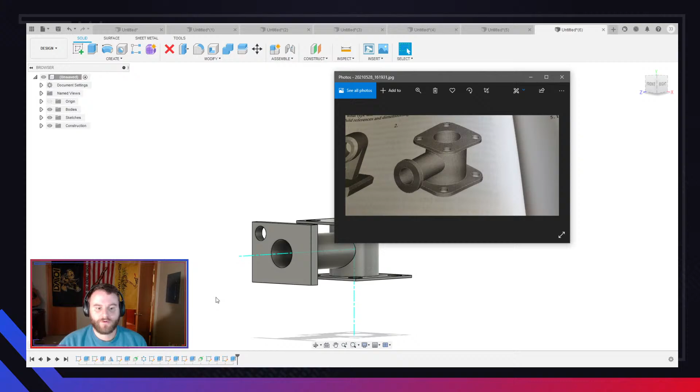This one, we'll go over this one real quick. And I know you're like, oh, CheapShot, that looks super freaking easy. But it's not, because this one has a different plane. So you've seen me make mid-planes. I love mid-planes. Mid-planes are my favorite. But this one's going to kind of have like an offset plane. We can see that it goes through at an angle. And so we can't come down, you know, we can make it on the top, but it's not going to have that angle that we want, especially coming out. So we need to make kind of like an angled offset plane that we'll draw it on.

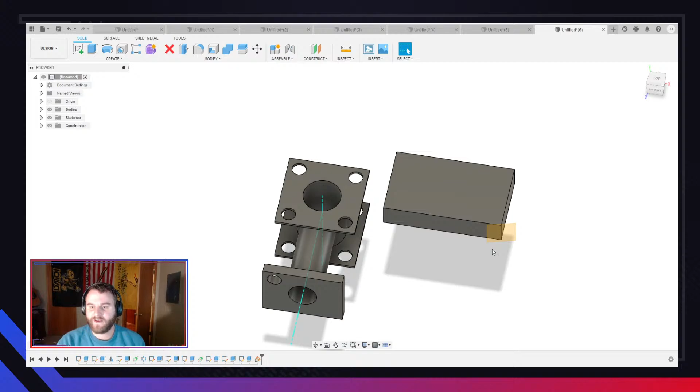So we can construct a plane at an angle right there and see how we can adjust it now. So remember that this plane, you know, it stretches to infinity. It goes on forever. So now I can sketch on this plane, create a sketch, and this will let me do, you know, see how I'm at it right there? So this will let me take and, you know, come down, over, up, and around. And then I can extrude this in through it like that. Let's edit that just because it's a little.

And boom. There we have that. So like I said, you got a lot of things up here for making different planes and whatnot. This part, so now we're getting into some tricky stuff. So let's start paying attention, folks, because we're going to start talking about sweeps.

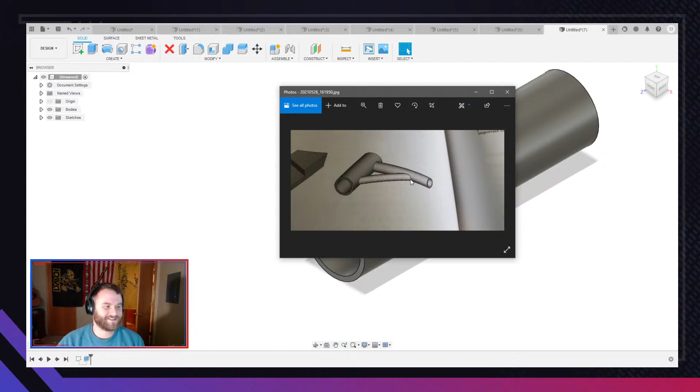How are we going to make this? We already know how to make a circle. Not a circle, but a pipe. That's totally fine. Make our pipe. Extrude it out. Let's make it long. We already got that. That was easy. We got another pipe. I can't tell if that is actually... no, this is the same thing as we did before. I don't think this is curved. Well, let's just make this and say it's curved.

So we're gonna do it on this plane. We're gonna have another pipe coming out. This is gonna have parts that are like inside of it. I'm not gonna go back in and close that. You guys know how to come back through and delete that, right? So now I want a curved piece from here to here of a curved pipe.

So create my sketch. I want it to curve from, let's say, here to here. How do I get that to curve? I'm going to do what's called a sweep. So I need to bring this down to a plane that I can draw on. And that should be fine. So now I need to come down here on this plane. And basically that line I just made, my shape is going to follow that line.

So this is where we start to get tricky. So we're going to sweep it, select the profile, that's that circle, and select the path, this one, and boom, okay, cool, I did it. You can make it pretty, but I think I can keep going, or I can cut it. But see how I was able to bring it along that line? God, that looks ugly as sin. But it's a sweep. You learn how to do a sweep.

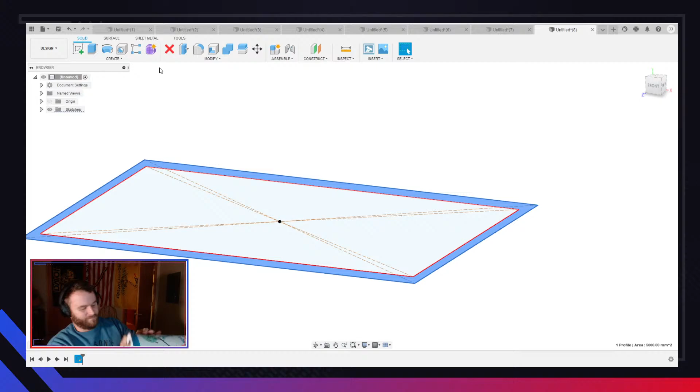Once again, I'm using the Creo Parametric 6.0 tutorial. It cost me like, I don't know how much money on Amazon. I'm pretty sure the GI Bill paid for it. But that's what we're doing.

So basically, I don't know if I can make this. So basically, it was a pattern. Yeah, I don't think this is... Yeah, this is just a weird Creo thing, so we're not going to do it. But basically, we could pattern this on the inside and just make it go. But we're not going to do that because that's just a weird showing off Creo thing.

This is, let's make this, it's like a pumpkin shape. So how can we make this pumpkin shape? We can make a circle. We can make a sphere. Fusion has a sphere tool, or we can make a half circle and revolve it. That works too. So let's do that.

Like I said, you got the sphere tool, but we'll just make a circle and then we will cut it in half. Then we will take this, we will revolve it around itself. Then this might get hard to view. You can change the visual style. I normally like to work with wireframe, or there's one that makes it kind of look like a cartoon. I use that a lot.

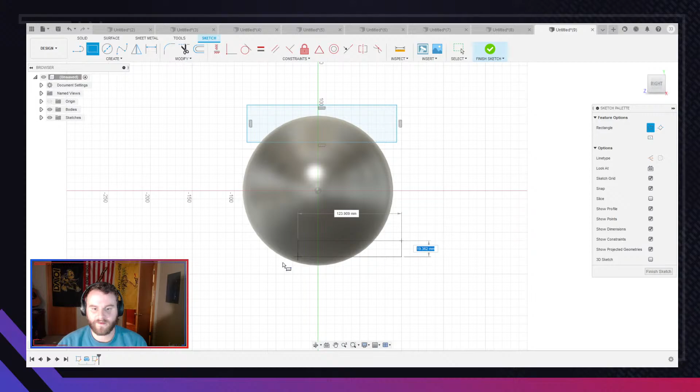But we can cut off the top and the bottom and basically make it flat surfaces that'll give us a chance to sketch on. Right? So now we got this. And, you know, we got to make this pumpkin shape. Well, let's do the circle real quick because we can do that. Right? Come down. It's got a chamfer there. It's got a chamfer there.

And then this is going to use, once again, something I've already shown you. We'll just do that. I'm sure you would actually want to measure it out, naturally. And let's extrude that down. And I want to pattern it, a circular pattern. Select this shape down here for the shape that I want to do. The axis is going to be that green axis.

How many can I get? 3. We'll do 6. And boom. Look at that. Does that look the same? No, but it's the same tools. Are you impressed? Because I'm impressed.

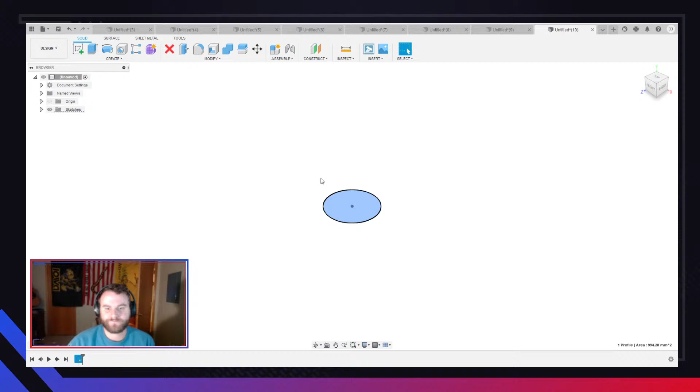This is the same thing. This is going to be a circular pattern in 2 directions. So how can we do in Fusion 360 a circular pattern in 2 directions? I'm not asking you, I'm asking me. Because once again, these are some very specific Creo tools that I don't know. I'm sure you could do it in Fusion. But have I ever done it? No. I haven't had a need to because it's weird.

I don't know if you can tell, but I didn't prepare for this at all. I mean, I prepared. I literally bought a brand new microphone in anticipation for this. But I also didn't practice these beforehand.

So our object is this. Our axis is in the center of this. But see, I don't think there's a way to bring it down. So that just might be a Creo thing. It doesn't really matter because I wouldn't want to make that anyway. We've made that part, unless you want to see me make that part. They must really love these parts. This one, let's make this one. Little wing nut.

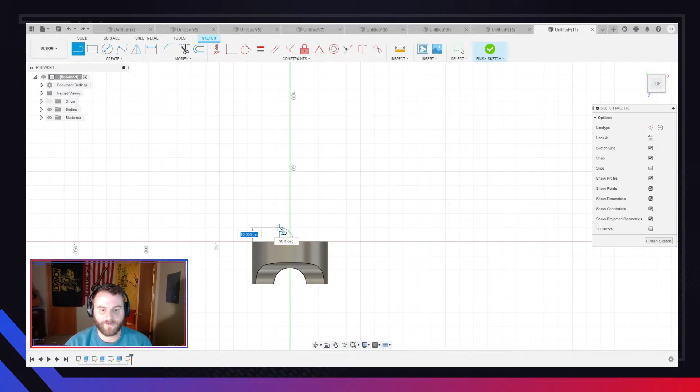So one thing we got to keep in mind is we're going to extrude this around. So I started on this center line. That was a bad idea because when I extrude it around, it would just come to a point. So that would have been a bad idea.

And then, now see how I automatically did these perpendicular things? Some different things make it so that way it's like equals, but Fusion doesn't do that. That's okay. So I can take this and I can revolve it around. Our axis is going to be that one. And then it's kind of got like a hexagon-y shape to it.

Notice how before we did the polygon, we had it to the wall and then we had it to the corner. We want to do the corner this time because if we did it to the wall, it could be bigger than the surface of which we're extruding on. And there we go. Is it close? A little bit.

How do you add a design or texture to a rounded surface, such as stipples or a logo to a rounded face? In Fusion 360, as far as I'm concerned, you can't necessarily add anything to a rounded face, because we are making something three-dimensional on a two-dimensional screen. So you can't make that 3D shape on a rounded surface. If you could, I wouldn't have needed to go back through and extrude out and then cut that.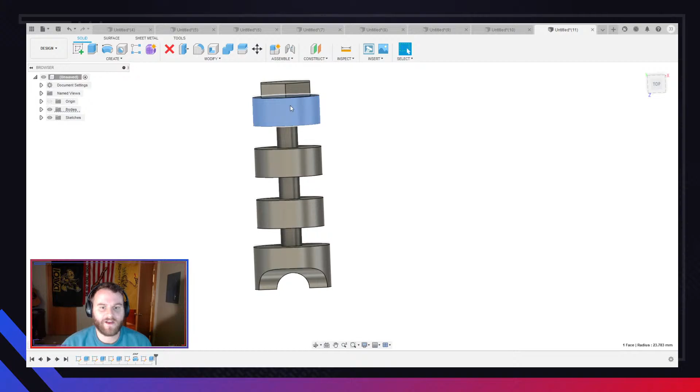But if you were doing like text or something, Fusion just added this actually. You can do like an emboss. No, that's not it. Is it? No, you kind of can't. So if I wanted to sketch on this circle, I hit sketch, it doesn't let me. It pulls out the flat planes. Like here's that circle, sketch, won't let me. You would have to do something else.

So if I wanted to stipple this, how could I stipple this? I can do it on this plane. And let's say I wanted to make little circles. 0.5. I could take and extrude those out. Wow, I made that small. Let's do it like this.

Now, I could be wrong. I know I'm over here teaching you this, but I'm not an expert. I'm sure there's some ways that you could do it on a surface, but the whole time I've been doing it, I haven't learned. I haven't experienced anyone who's done it. I haven't seen it done.

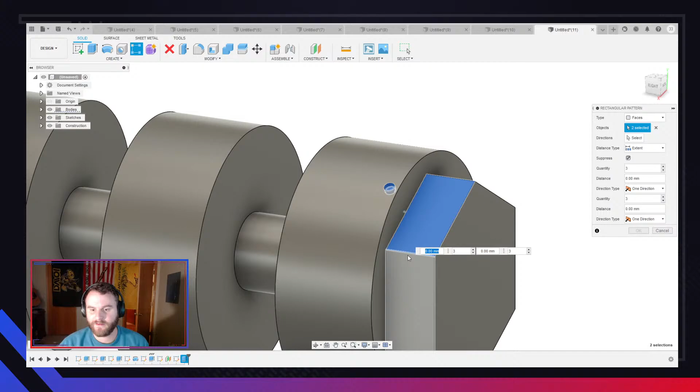So let's say I wanted to add some stipples to this, some textures. I can do what's called a pattern, and I can do a rectangular pattern. And the directions, my objects, I want this. And I don't want to do a rectangular pattern. I lied, I do, but I just want to go one way. Sorry. And my direction, I want to extend. Damn, you've really made it tricky for me, dude. Rectangular pattern, that feature. I want to go along a single line. God damn it.

Yeah, I know I want to revolve it, but I want to add more. So like, I need to add just, I want to make more down the side. But I can't figure out how. So what he's basically saying is I'm having an issue making more of these. I could just click this. That's what I want to do, my circle pattern. Or maybe it's not because it's not on that plane.

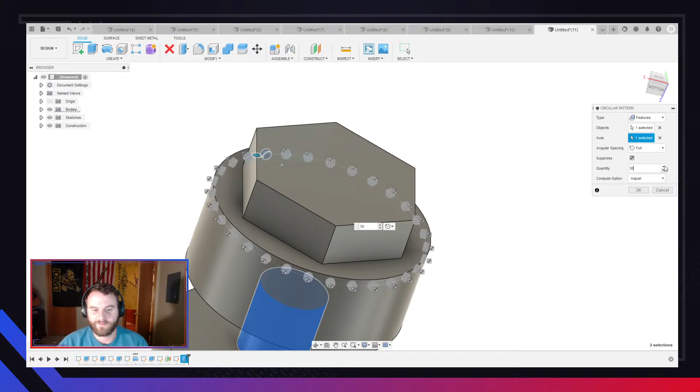Click that. Pattern. Circle pattern. All right. Objects. Do around there. Okay. And we want to make a bunch of them. No, dude, I'm an idiot, man. This is fine. So we got all these. And basically, you don't want to do too much, and Fusion may get mad. But basically, he's taking these, and we should be able to pattern these in a rectangular pattern. So we have all those selected. There we go. Now we got it.

I don't know what the major malfunction was, but then we can add a whole bunch. And if Fusion's going to get mad, it's going to tell me. Oh, never mind. But boom. And there we can have some sort of texture to it. I don't know why that messed up. But you could do that in reverse too. You could bring it out. You could stagger them, revolve them all. Yeah, that's what we did before with the flag thing. I don't know if you were there for that live stream, but the guy wanted to make a flag.

So this part. All right. This is my favorite part. We just did a video on this a little bit ago, and it's my favorite part because it's so easy in Fusion. This is going to be called a blended sweep. Fusion 360 calls it a, oh yeah, look at you go. Oh yeah. Fusion 360 calls it a loft. We're going to go from one shape to another.

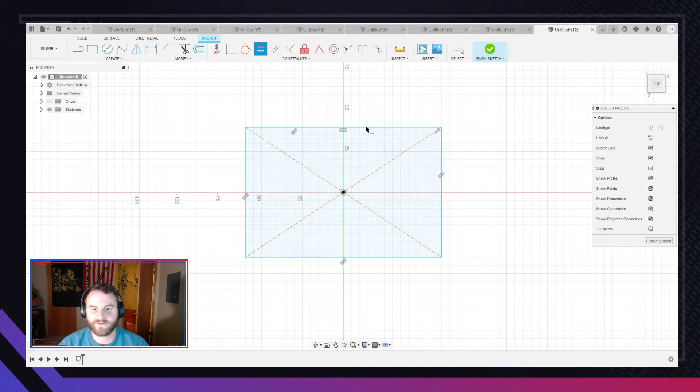So we want to start off with, let's look at this. We go from a square to a circle, or we go from a diamond pattern to a circle. So let's start off with our base, right? And I want these to equal each other. Whoops, that's parallel. No, it's equal. That to that. Finish. Extrude it up. So now we make our cross.

And if I actually wanted to make it, I don't know why, but my mouse is just super sensitive. And sometimes when I do these things, it clicks twice without me even thinking about it.

So I want to make this equal to that. We'll make that equal to that. That equal to that. We'll make those equal. Make that equal to that. That'll equal to that. This equal to this. That equal to that. See how it's slowly forming? And we'll just send them all to each other. And then we got our cross. Over with constraint, that's fine. Wow, that looks ugly. Never mind.

We're going to do this. Rectangle. Rectangle. Call that finished. All right, we want to extrude this up to a circle. So we need to make an offset plane. We'll bring it up there. So our circle that we want to sketch it to is to there.

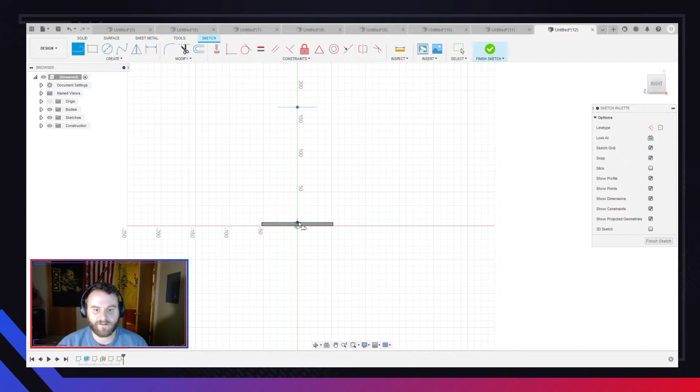Kind of like when we did before with the other normal loft, we need to make a path for it to follow, which this is going to be a straight line. You could do a zigzag line or anything. And so we want to go from a loft. We want a loft from all of this, that's profile 1, to profile 2. Boom. Pretty cool, huh? This is my favorite.

That would have taken an hour in Creo, at least. And the reason it would have was because Creo has a hard time, while Fusion makes it so seamless. So basically we have 1, 2, 3, 4, 5, 6, 7, 8, 9, 10, 11, we have 12 points on this cross, going up to no points on our circle. And you can even see where they had to add some of those points onto the circle. I can drag these around if I don't like how they're in place. But Creo just makes it so hard to do that.

And I know this isn't a bashing on Creo convention, but God, I hate Creo. And it just sucks that I have to use it for most of the stuff that I do. But see how easy it is. So that's if you wanted to clean it up or something. I just made it ugly. I just did the reverse of it.

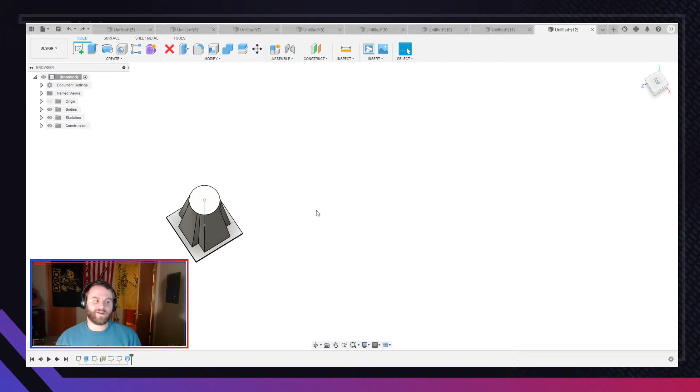This is a hook. So like I said, we can do that loft, or they call it something else. We can do a sweep or a loft on a curve. In fact, the picture, of course, has it on a curve. So for this snatch block, it's pretty simple. This was actually my final. Your final, you had to do a couple different parts, and this was one of them we had to do.

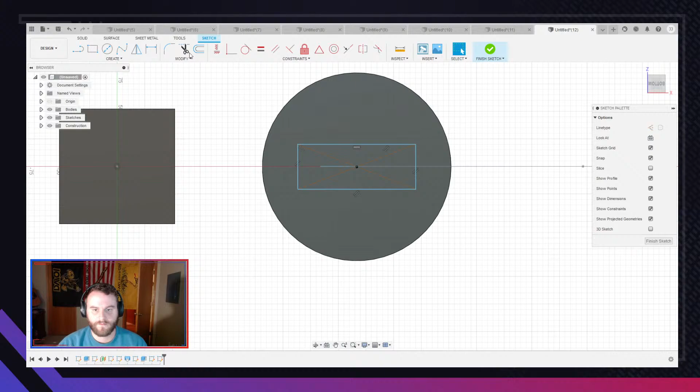So I'm just going to do some sort of weird shape like this. God damn it. So, but my shape, I want it to be like a hook. So, I don't know. We'll make it like that. And then I can do my sweep, my profile. I want this, this, and this. My path is I want this. And I want to join it.

And there's my hook. God, that looks ugly as hell. Ugly as hell. But that's using the, what do they call it again? I call it a sweep. They call it a sweep. That's using the sweep tool, which is what that part would tell us. This is doing the sweep tool, same thing. You know, you can come over here and make a shape.

I want to do it on that plane. You can come over here and make a shape. I want that to be parallel. Oh, not parallel, I just want that to be horizontal. I want these to be equal to each other in length. I want these to be parallel. I messed up. That needs to be connected to that.

So basically what it's trying to say is you can make it any shape you want. So if I wanted to make a polygon, I can sweep. My profile plane is that one. My path is this line. And I can bring it all the way around. I don't know why it's getting mad at the end, but there it goes.

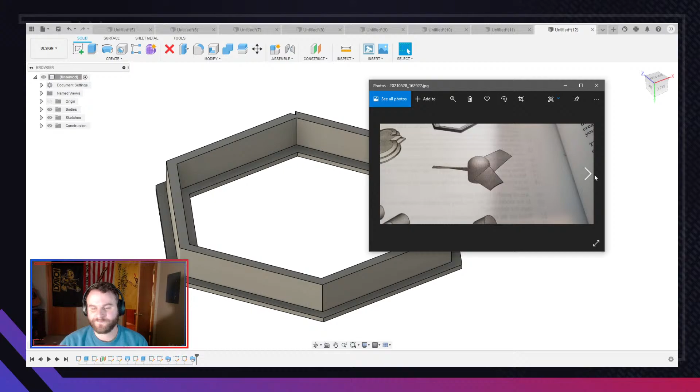We'll make this propeller because that's the second to last one. We're almost done. So it's rounded up at the top. Let's make this circle. Right. We're actually going to start a new one because, once again, this is a hard one where we need to make sure our planes are intact or we're going to be sitting there adding a million. So come up.

I mean, you could use a fillet and make a dome piece. I guess we'll just do that. That's fine. And then it comes over here. Let's do an arc shape. So if we were making a propeller like this, we need to make it thick, so we can offset it just a little bit, connect them up, hit OK. We can extrude that out, join.

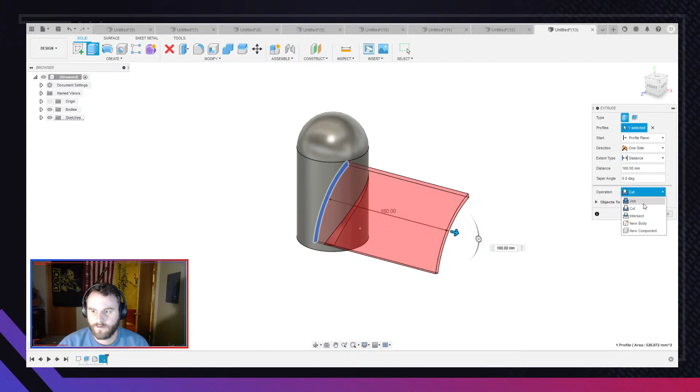And then I think this wanted us to, oh, okay. This is different. Basically they made this, but then it goes to a different shape. So it goes from there to here and it's kind of curved, but then they have it come to, let's say, a straight piece. I was wondering why. I'm like, this is like a pattern, we already did that. But then it comes to this shape, you know?

So we need to have the line on which it's sketched. I think it'll follow it if I do this. Sometimes, like in Creo, it wants it to be in the middle of the sketches. Now this should work because it's got the same amount. Oh no, it's got to be the other one because I have to select two profile planes. So I want to go from this one to that one. And my rail is this. I guess it doesn't really matter. Join. See, that's what it wanted us to do.

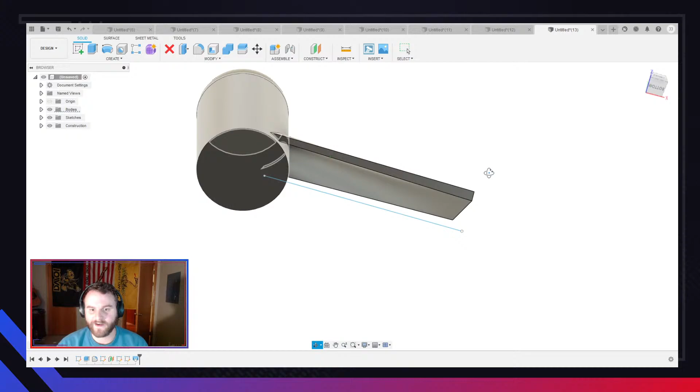And then we can take this loft sweep, it's all the same thing, and we can circular pattern it around the base. And boom, we made propellers. We're submarine engineers now.

And then we got the final one. Oh, I closed it. The final one was basically using the sweep to make a square, and then lofting it from one to another. So that's all the parts. That is all the exercise parts in this entire book.

You guys can now come to the school that I go to, take Intro to Mechanical Engineering Design, and pass it with flying colors. But it's a great class.

So is there anyone that has anything else in Fusion that they want to learn? Any modeling things? Any 3D printing questions? We're just hanging out now. My bladder's filling up, so I don't know how long it'll be, but let me know. I can just talk. I appreciate all of you. We'll give it a few minutes if anyone's got any questions. Give it like 20 more seconds. Got a question, ask it.